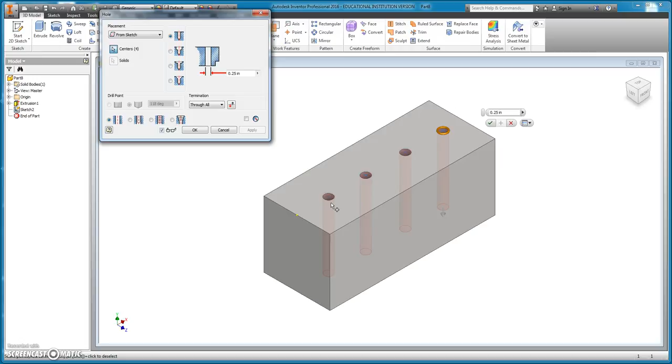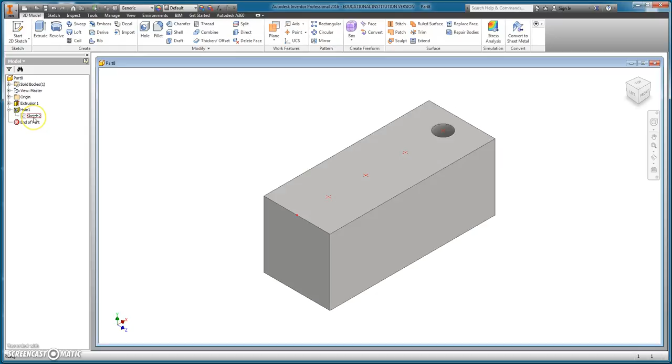With these 4 points, I don't want to make all 4 of them the exact same hole. So what I can do is, if my center's arrow here is selected, I hold the shift key down, and I can actually deselect those other center points and manipulate this hole on its own and say OK. Again, I can go back to that original sketch, turn its visibility on, and use that hole feature again for something different. So I'm going to deselect 2 of these and show you some of your other options with the hole feature.

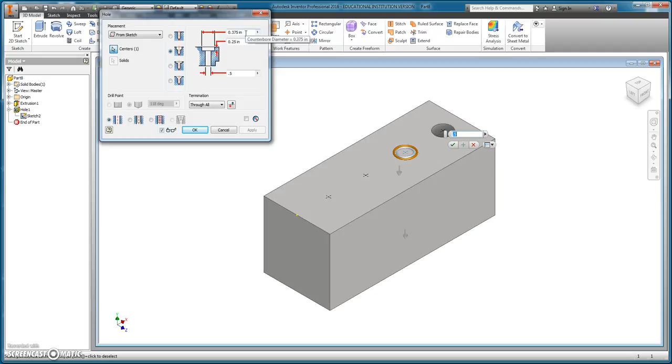This vertical column allows us to add some features up top. For example, this counter bore. What a counter bore looks like is just what this pictorial is showing here, but I can say that I want, let's say, a 0.75 inch counter bore, a 1/4 inch depth, 0.5 diameter hole on the bottom edge, and maybe I don't even want to go all the way through. I only need it to go 1.5 inches or something like that.

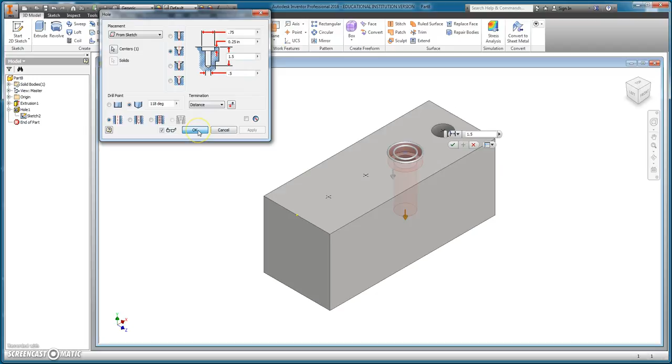Another option would be a countersink, which is this one on the bottom, that instead of it being a flat shoulder like the counterbore, the countersink actually has an angle, 82 degrees is kind of a default. That one we're probably not going to manipulate, but maybe I want this to be a smaller hole at 0.5 and my through hole at 0.375.

And we'll say distance, change it to through all. We'll go ahead and apply that one. Notice that if I clicked apply, it works its way through those holes. And maybe for this one, we'll just do, again, a regular hole, going all the way through.

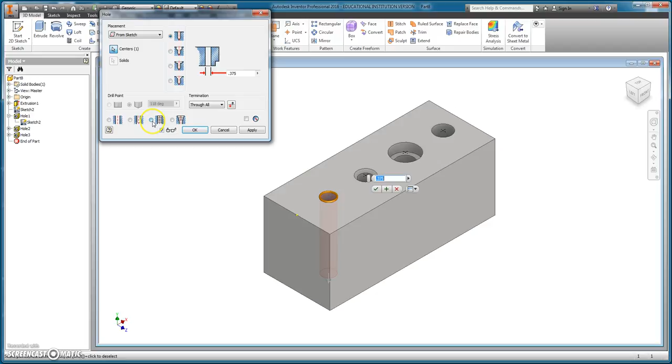But down here, this middle or third option here is a tapped hole. And what that means is I'm adding actually threads to it. For whatever reason, this is being a little slow, but once it comes up, I start to get some more options.

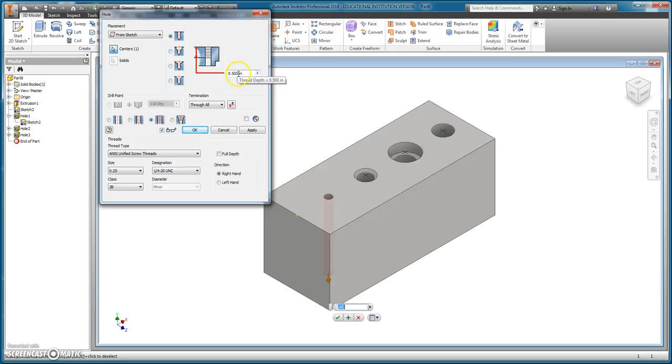I can say I want, let's say, a 1/4 inch diameter hole. Then these are the thread types that are available for a 1/4 inch diameter hole. I could say click on full depth, or the threads can go a specific length up here. I'm just going to say full depth and say OK.

What I'm going to do here is actually create a new sketch and view slice graphics, and now you can see those characteristics. This was just a through hole, single diameter all the way through. This was our counter bore that had a diameter for the counter bore, a depth for the counter bore, a diameter for the hole, and a depth for that hole.

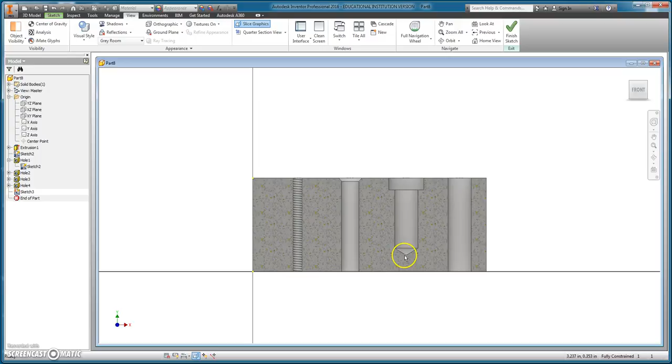This was our countersink, which had the angled top that had a diameter assigned to it, the hole that had a diameter assigned to it, and then our tapped hole that has threads.